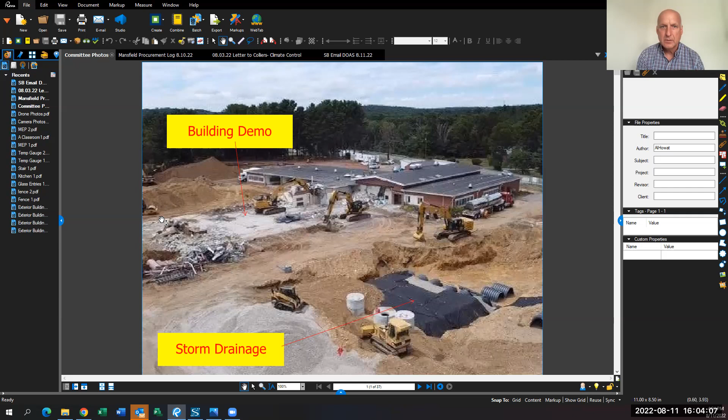This is the storm drainage that's in the new parking area. That's about a third done. There was one on the other side, which is complete and graded off, ready for the playground over there. Regarding the abatement and demolition, how is that schedule-wise? Actually, we're looking pretty good. I think we're going to finish up about a week to a week and a half early. That's good news. This opens up a lot of room. Once this storm drainage goes in and gets backfilled, it opens up a big area for the parking lot that they can start on. So it's got a real good start.

It's just another aerial view. Can I ask a question about abatement?

Sure. One of the things we heard during the earlier discussions about whether or not to build this school was that there were contaminants present of various kinds, and I'm wondering what you found in terms of asbestos, lead, PCBs, whatever needs to be abated. Everything has been pretty much per the plan. We do have a small change order for some additional glue dabs on blackboards and tack boards, but that's the only extra thing we found. In terms of finding some of those, there's no surprises. Those substances have all been present, but they are being abated.

Is that correct? Yes, the only additional item we've had is we had to test some additional blackboards, and they did come in positive for asbestos. So we had to remove that, but it wasn't a large change order.

This is Adam with Colliers. Just to expound for 20 seconds, the hazardous materials consultant, Langan, who was retained to go through the building and identify hazardous materials, is the one that picked out all those locations. So when Al mentions the discovered condition, which we're still reviewing, that was in addition to all the elements already known by the hazardous material consultant. So for all intents and purposes, the abatement occurred in alignment with expectations. Correct.

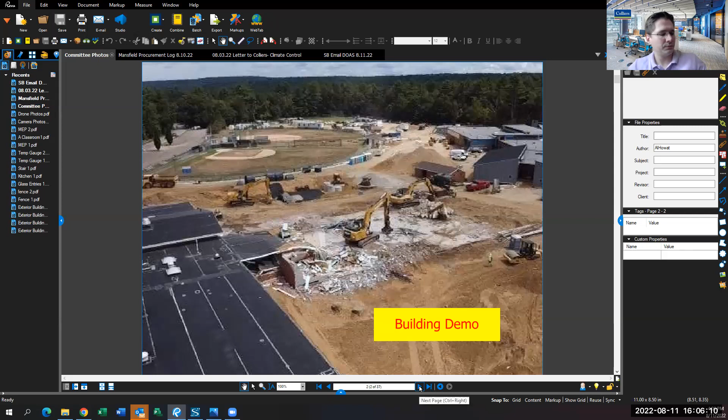So this is the area of the other storm drainage system that I had photos of at the last meeting. This has been complete, tested, backfilled, and actually the playground contractor started layout over here today.

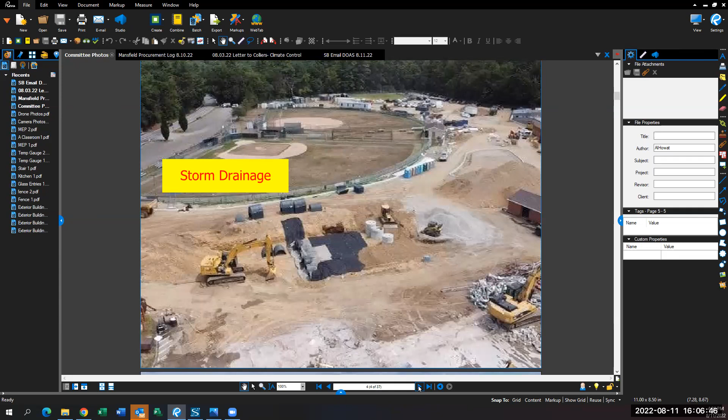Just another aerial view. Those circles we're seeing in that picture weren't the bike path, were they? No, the bike path is farther down this hill, I believe. So this is just a regular playground area. Yes.

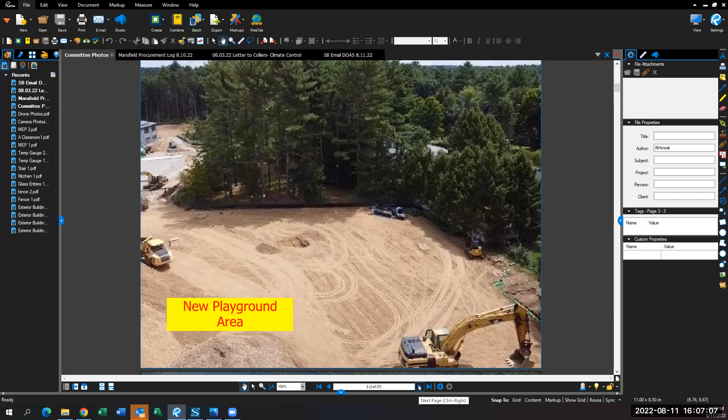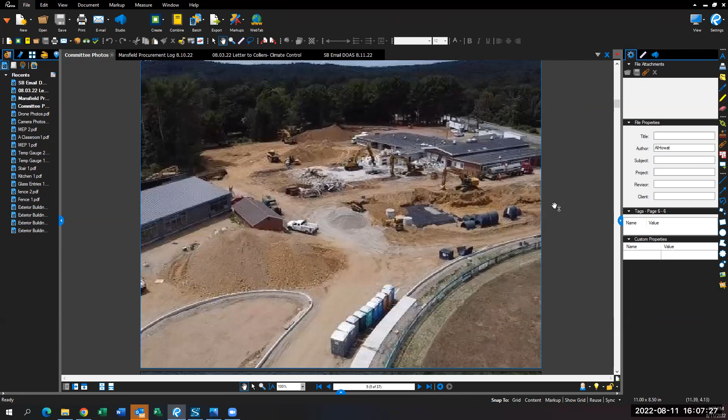Just another aerial view of the storm drainage, and a little farther away. This is the area where there's a new playground set up. So once this is done, we'll finish the curbing for the bus loop and start getting this ready for paving while they work on the parking lot.

This is an aerial view of the building from the west side. These are other activity areas here as well, which are coming along pretty good.

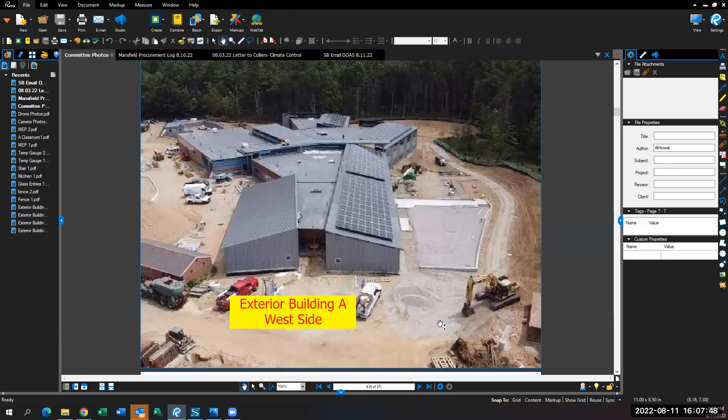This is the exterior building, west side. They've got the Ipe going here. They should finish this up within the next couple of days. We have the Ipe for the canopy, and we have a delivery date for that. I believe it's coming in two weeks or a week and a half, and then that will start going in.

Is the framing for the canopy about to start? Yes, actually the wood is in their shop now. They're just preparing it for delivery. And those are the posts, where the posts will be bolted down, we can see. And is that starting relatively soon? Yes, that will be starting in the next week and a half.

This is the loading dock area. The Ipe siding is going on here as well. Masonry is finishing up for the retaining wall. The curtain walls are going in.

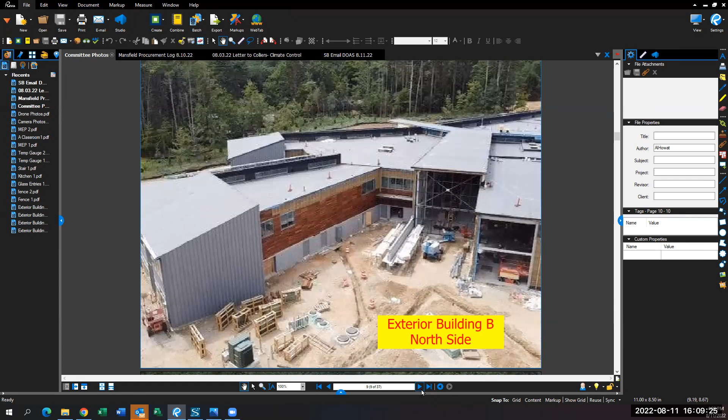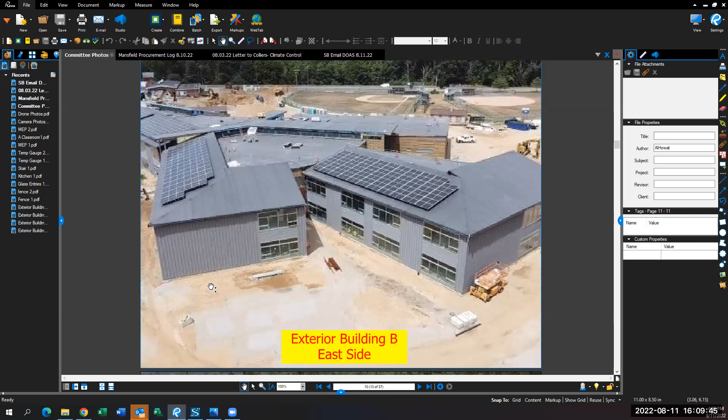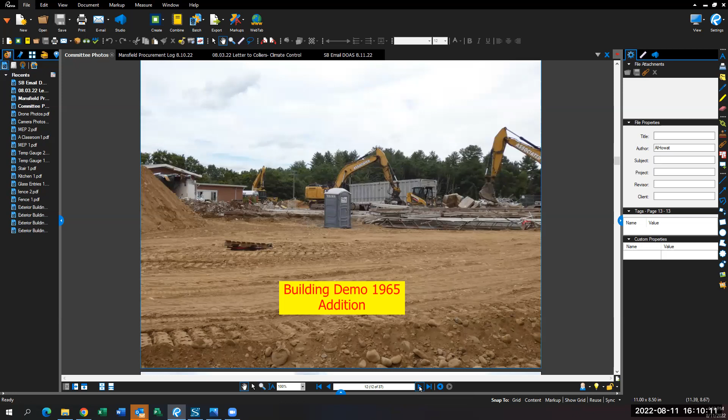Some ground pictures. This is the building demo, 65 addition. Storm drainage in the parking lot.

It's the IPE siding going on in the nook in area B. Once this IPE is done and the soffit fascias are done, they'll start the concrete walks.

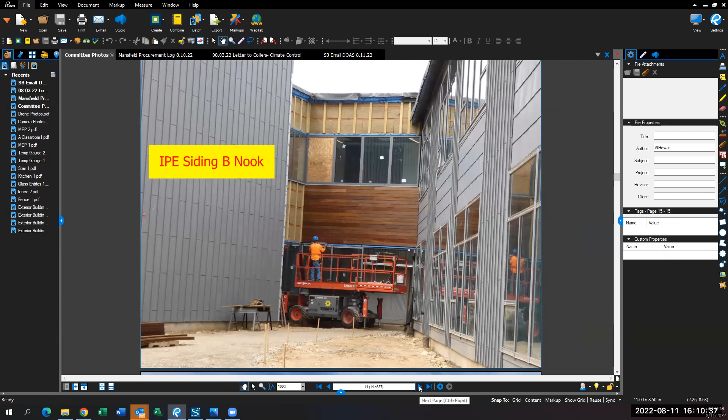Retaining wall itself is done. It's just waiting on the cap. We need to get another sample and get it installed for inspection by the landscape architect.

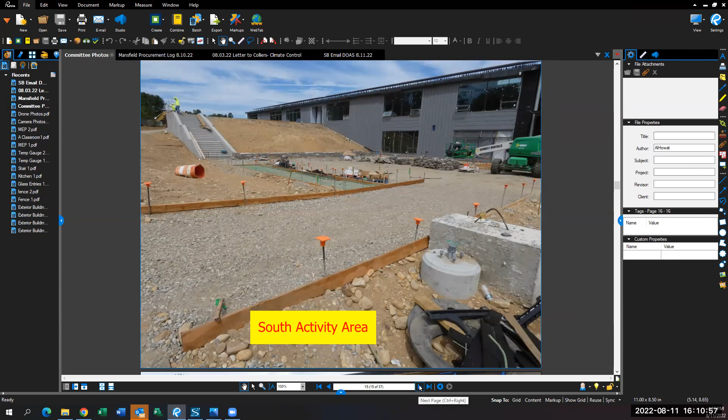It's the IPE siding at the gym. Installing IPE siding at the gym.

Loading dock area. This is area A, west entrance. They do have all the entrance frames in. The aluminum frames are starting to put glass in now.

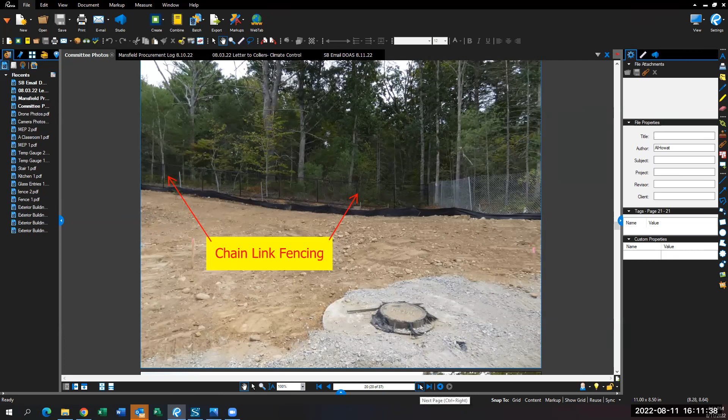The fencing contractor has started. He's got his chain link fence up around the back side, or the east side, of the property. He's done his chain link around the pump house.

And he also has the board fence, which will be along the west side of the property and the south side of the property in the front by the road. And along that property line.

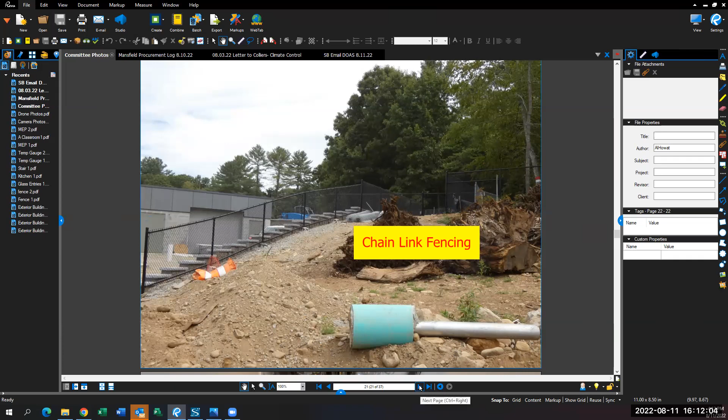And that fence goes all the way around the backside of the pump house, right? Yes, yep.

This is A corridor, A wing. We're getting ready to do ceiling grids in here next. We've already started all the rooms.

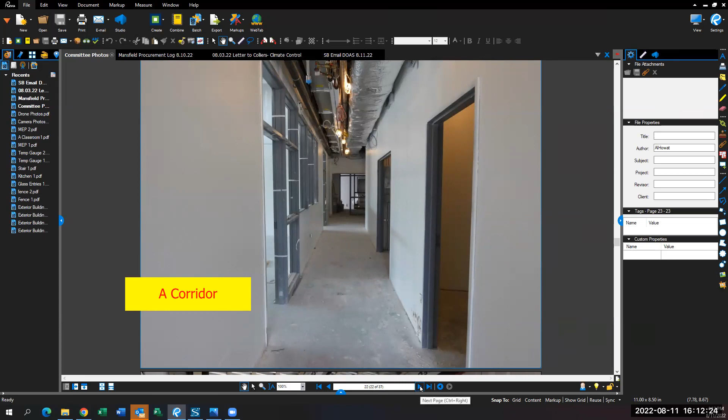A classroom is just about ready for finishes. But it's been too hot and humid to really do anything.

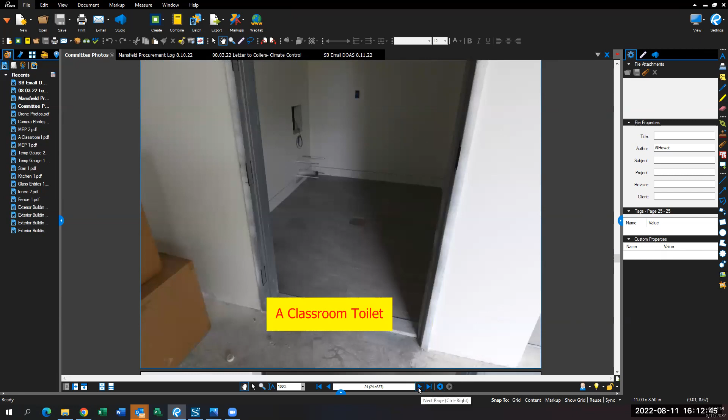These are the A classroom toilets. So every toilet in A wing now is done. There's one for every classroom. And then there's a few in admin too, which those the tile has been done as well.

So, Al, there was no issue, there's no issue in A with the dusting.

We took cores today. We did 2 cores in A, two cores in B lower, 2 cores in B upper. We're having those analyzed. We do have dusting in A. We just don't know the extent of the issue. That's why we're having the cores tested.

But so you could go ahead and do this floor, these floor people weren't as particular? Well, how come it was okay to do this tiling and not others?

Yeah, this is not affected by the dusting slab. The tile work can go on that slab, no problem. It's only for the resilient. It has a glue that just won't bond to the dusting concrete.

I see. This is... Thank you. More of a mortar base mastic stuff. Uh-huh.

So we started putting toilets in the A-wing classrooms, following the floors.

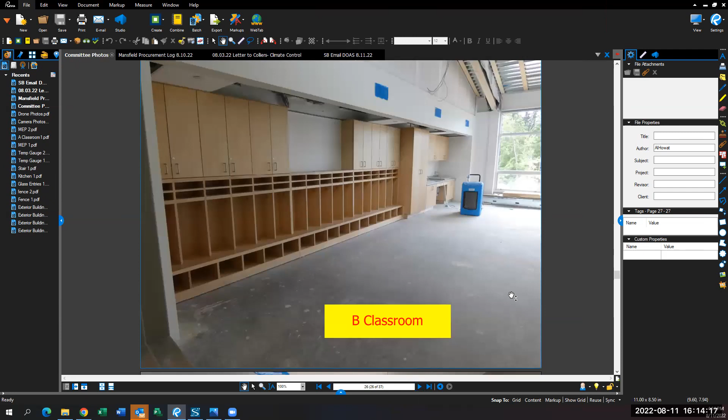B-wing classrooms, a lot of finishes are getting installed now. It's basically ready for other finishes, flooring and acoustic panels and so forth.

In B-wing, we've done a lot of the ceiling tiles. We have been keeping this area under 55 percent humidity, so we don't see a problem with that.

These are the hand wash sinks up in front of the unisex toilets. Those are installed now.

We have toilet partitions coming next week. They're supposed to be delivered to their shop tomorrow.

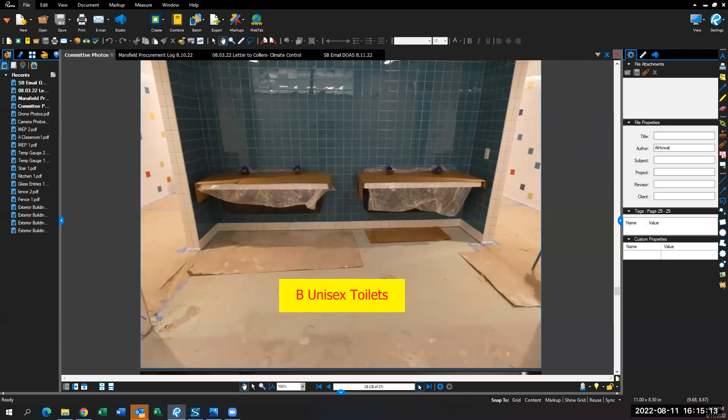But we are having a hard time with the temperatures. This was taken today, and it was a fairly cool day, but it's almost 90 degrees inside.

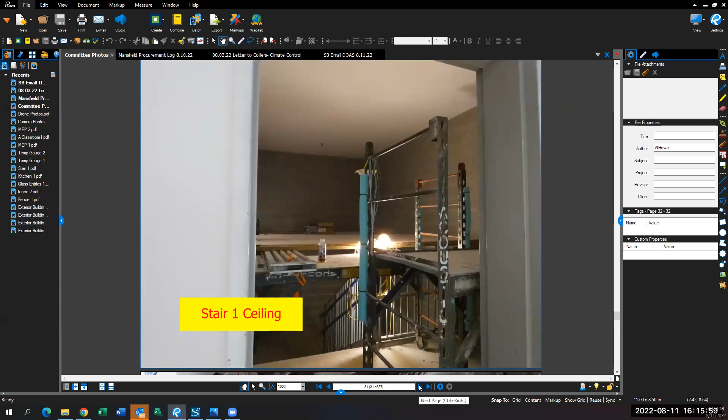In the kitchen, we got the epoxy floor in. We're going to put protection on this tomorrow. And then we can start the porcelain tile out here.

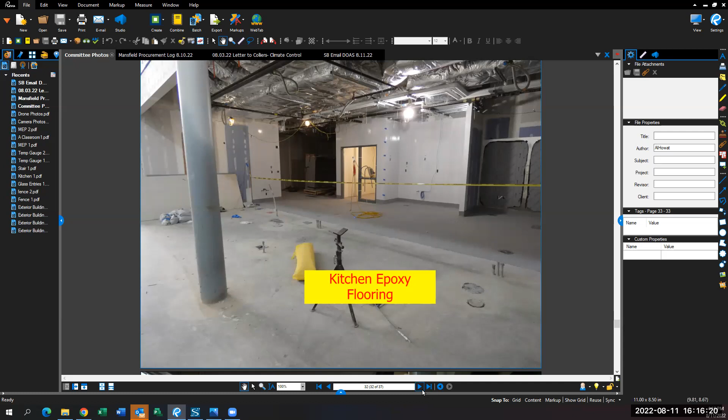This is that curtain wall in the cafe.

They said they're putting all the glass in the entryways.

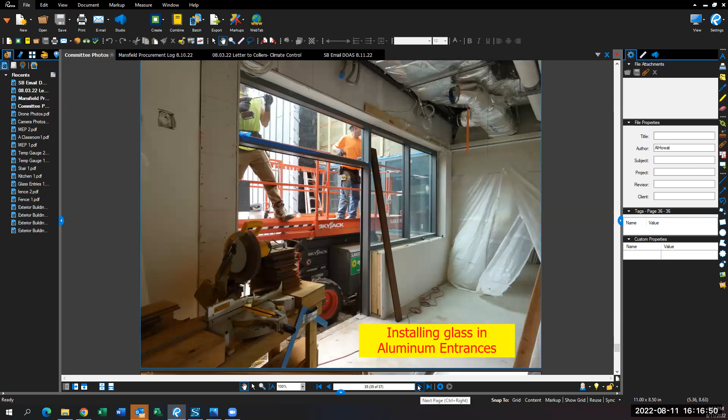MEP roughing is ongoing. This is all the plumbing for the heat pumps, which we'll need for air conditioning or heating.

And they've started putting in, this is a speaker, they've started putting in some finishes for the electrical specialties. So that's it for my photos.

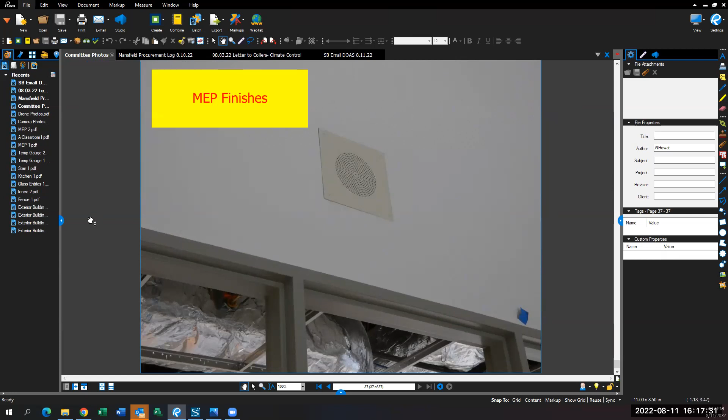Any questions on photos? Chris? Al, I noticed the curtain wall in the cafe, the gym, walls, they're not done. The glass isn't in yet.

You're still holding off because of the DOAS units, or what's the holdup there? This curtain wall here? Yeah, they've just installed this. It's secure. They're going through each pane now, caulking each of the openings to install glass. So they were hoping to have glass in here tomorrow, but if it's not done tomorrow, it'll be done Monday for sure.

Because isn't all of that hindering your ability to get more conditioned air happening? It is, but we don't have anything to give us conditioned air. We have some AC units in B, but they're really not doing what we need them to do.

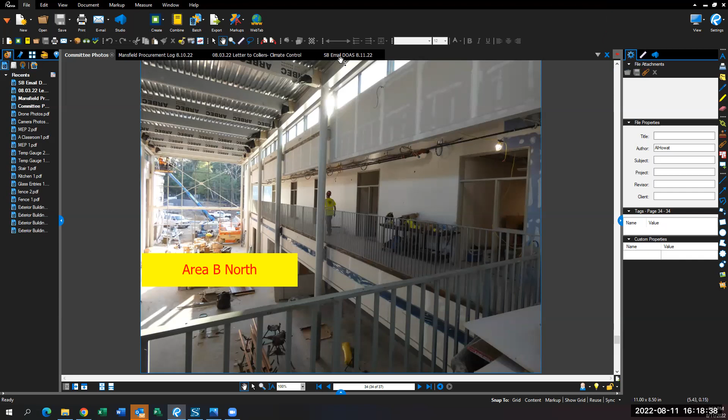So what's the projection now on the DOAS? Actually, I got an email from Sullivan Benson this morning. Can everyone see this email?

Yep. I asked him, any update on delivery of DOAS? He says, we need the main fan section. It hasn't shipped. Swan is supposed to be getting an update.

So I called him back and asked, I wanted to ask him, have they shipped anything? Because it sounds like they shipped something, but not the main fan section. But he was not in. I left him a message to call me back. So I should have an update tomorrow.

And find out if he has received anything and what the expected ship date of this main fan section is. Because just like you decided at the last meeting to do a different walk-in, how much longer do we wait for this DOAS unit before we say we have to get something else?

I think it'd be more time to get something else, probably. This is Adam McCullers. It's a much different animal than a walk-in cooler unit, which is its own compartmentalized thing. There's a design process, it's very customized. To switch to a different manufacturer would be like starting from scratch. It's not a simple one for one.

No, I realize that. However, we've been waiting for this thing for months, and now it's starting to hold up the job because you can't do certain things unless you have a conditioned space, and it's August.

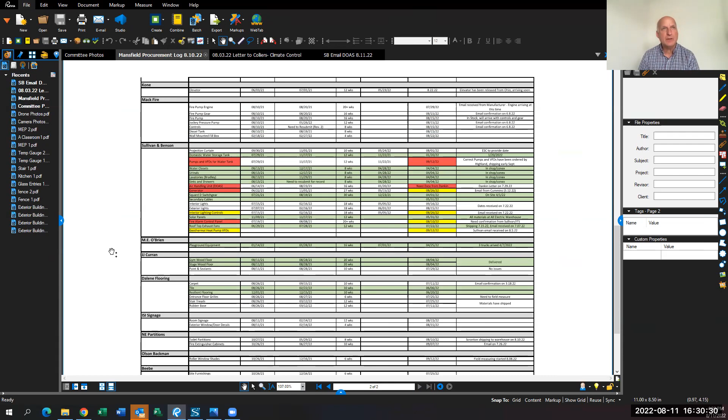Because even without the DOAS unit, could the heat pumps help cool, or do you need the DOAS for that? From what I understand, they can basically circulate air, but there's no conditioned air. You're just circulating the air within the building. Okay, similar, I mean we have fans all over the place too, and they help. Right, circulation of air in the building does help.

But, can I jump in here, Andy? Sure, go ahead. We've coordinated with Craig Raza, the mechanical engineer, and we've talked about the DOAS unit for a long time now. We've talked about the heat pumps basically this week. The issue with the DOAS unit is that it provides the fresh air, so you need it for occupancy, but it's your fresh air swap out. It doesn't condition, it doesn't do any of that. The heat pumps are what drive the actual air conditioning portion of it, but they don't provide the fresh air.

So up until this week, the notion was that the heat pumps and the other portions of the mechanical systems, minus the generator and some other items that have been pushed a bit, would be able to provide conditioned air to the spaces. It just wouldn't have the fresh air intake required for final occupancy of the building. So you could get cooler temperatures and whatnot. But if there are no variable frequency drives, the heat pumps cannot function. So the fact that those are delayed by some amount will impact the overall sequencing of the building and the completion of some of these spaces.

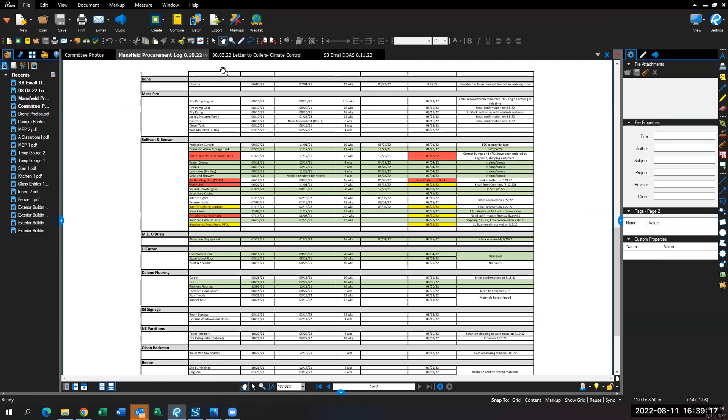I'll take that one, Adam. No, we have not been involved with the state specifically on this project. The state is well aware of procurement issues right now when we reviewed other change orders with the state, so I don't anticipate this affecting anything from a state funding standpoint. It's more everything that Adam laid out, as far as scheduled deliveries, impacts both to construction and also impacts to furniture, equipment, and delivery schedules that were anticipated to start on September 20th.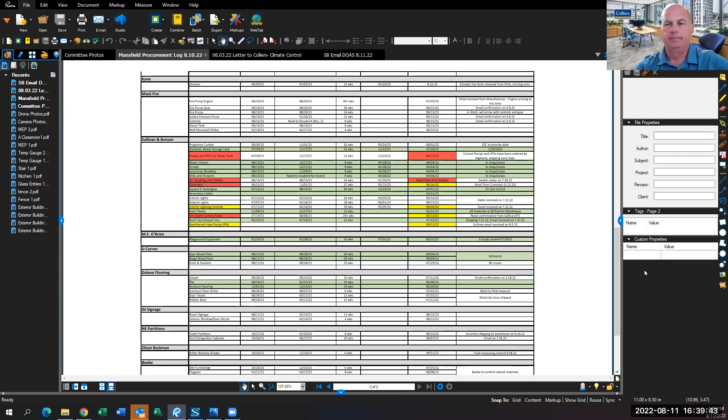Okay, Chris, you've had your hand up for a while. Thanks. Adam, are the VFDs really hard to find things as well, or do other companies make the ones that'll fit in our unit? Is that an exclusive thing that we have to get from one purveyor, or could we go elsewhere?

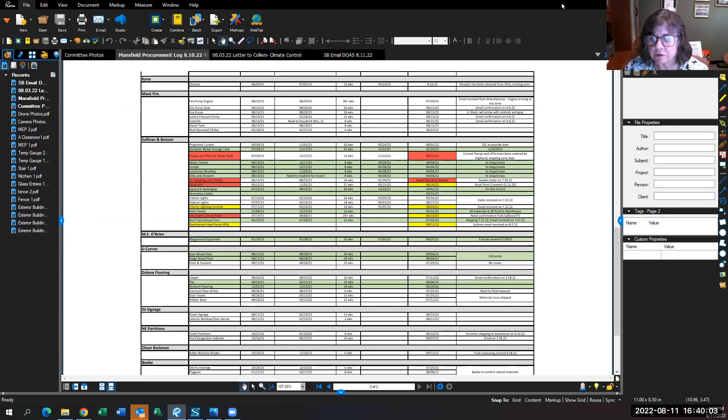My inclination is that's somewhat similar to the mechanical units. It's likely not as involved, but it's not as simple as you have this product, you go to that product. All of these are designed and have fairly tight tolerances as part of a complicated mechanical system. For example, the freezer was a little simpler—it needs to maintain some amount of insulation, there's a horsepower of a motor, that kind of thing. With this, there are a lot of tolerances.

So, in the abstract, if this manufacturer all of a sudden shutters their doors, could we get additional VFDs? Yes, I'm sure there are other manufacturers. At this point, would it make sense to go back to the drawing board, look at new specifications, and try to get an alternative manufacturer?

That I don't know. Like I said, we just heard about this today. So part of it is we need to understand what the crux of the problem is. Is it some market-driven problem where none of the manufacturers can get this certain chip from overseas? Or is it similar to the freezer unit, where there are other manufacturers that could potentially do it, and it's just that one had an issue and couldn't deliver.

So on your questions, both on the DOAS, but to a greater extent the VFD, obviously we're going to look at all the options to see what makes the most sense. But if I had to just estimate right now, it probably would be more efficacious to identify where these are rather than trying to resubmit. But we're looking into that and we'll get the data from the vendors. Thank you.

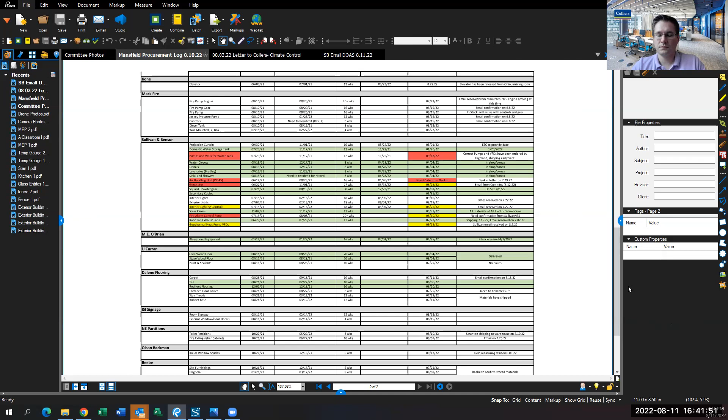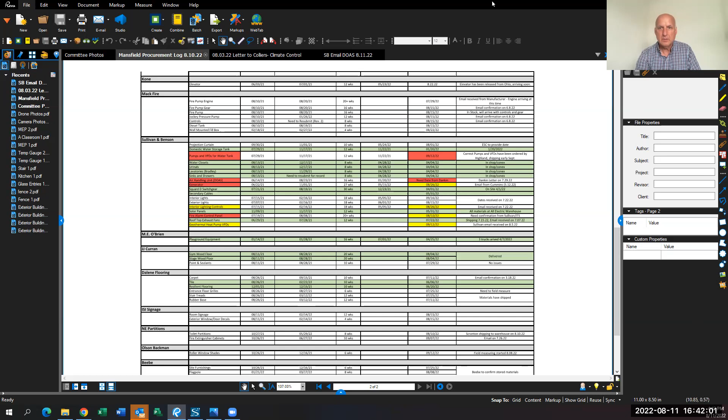Okay, any other questions for Al? Okay, seeing none, then thank you, Al, for that update. And we can turn it over to Jeff for the architect update.

Okay, I don't have much. I was out last week on vacation, so I'm playing catch up, but basically just responding to RFIs and submittals, and I'm due to go to the site soon for another walkthrough and another site observation report. So we'll see—looks like they're moving along quite fast, so I've got to get over there and start moving through the project again.

Okay, questions for Jeff? All right, so then let's move on to the OPM update. So Adam? Yes, so we actually talked about a number of the topics I was going to bring up with Al. The four focal points for the project are demo and abatement, the site work, the interior of the building, and then the exterior envelope.

As Al has kind of alluded to, the demolition has gone very well, which helps alleviate some of the stress on the site portion of the project, which we knew was a critical factor in getting the parking lots done, all the attendant stormwater and utilities and all the things done. So I don't want to understate that that's a very good piece of progress that has been made.

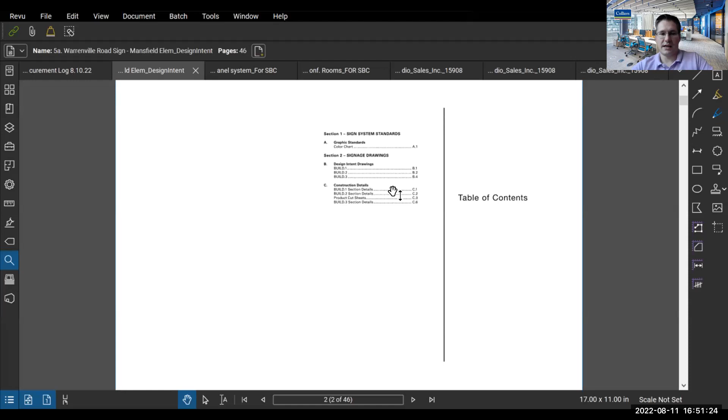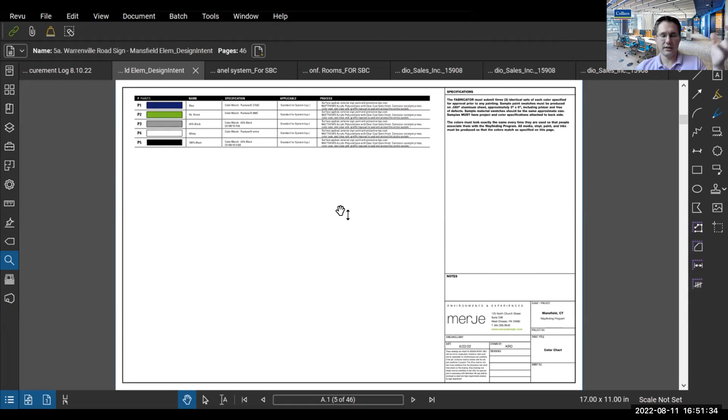So in terms of the type of sign, for example, the way that the wayfinding signage for the entire town has settled was for buildings of the nature of the elementary school, where it's a substantial public building. The option across town would be this low stone option that you see here. The font, the color scheme, and so on, that's what's been put forth by that committee and is being implemented throughout the town.

In terms of this committee and the signage relation to the project, obviously Colliers works for the committee and we'll do whatever the committee wants in this regard. However, I do want to impress that this is what the town has elected to move forward with in terms of the signage. And then in terms of the location, I did do some additional due diligence there, working with the signage consultant.

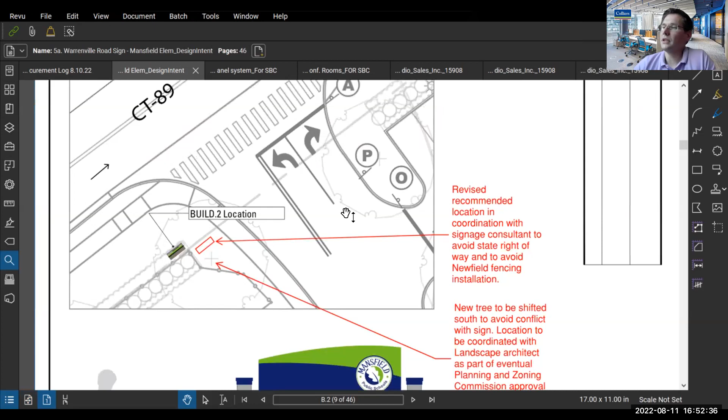Essentially there are two locations that were initially earmarked for this monument sign in relation to the power being brought out there for some of the pin lighting. This dashed line here, it might be a little hard to see where it's gray with a little dash and then gray - that's the property line separating the project site from the state right of way. So there's a strong recommendation not to have the signage out here in the state right of way as initially suggested by the signage consultant.

That would require a separate permit, and if there's any changes in the future, it's on state property, so there's always that conflict as opposed to being on town property. There's also discussion with the signage consultant about potentially incorporating it into the fence here.

There's a suggestion not to do that, to avoid conflict with some of the Newfield fencing work done as part of this project, and who's responsible for putting it in and taking it out while the site is supposed to be getting cleaned up.

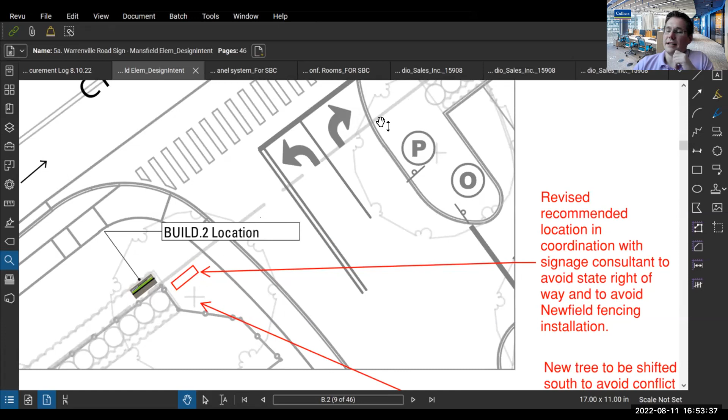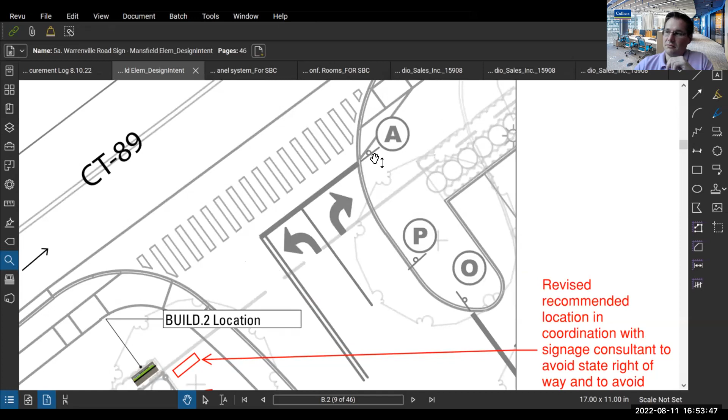So you're left with two locations, one as I've drawn here, and one on the other side. The signage consultant did not recommend having it on this side, largely because when you turn into the site from either direction, you're pulling into this lane, not on this side. And more pertinently, if you've got cars waiting to exit, they'd be blocking the sign if it's not in the state right of way, and you wouldn't be able to see it, particularly if coming from the south. So we're left with this one location.

I believe this tree here was brought up as a point of discussion. This is a new tree that will be flagged on the site by the landscape architect, so it can be shifted out of the way so there's no conflict between the tree and the new sign location.

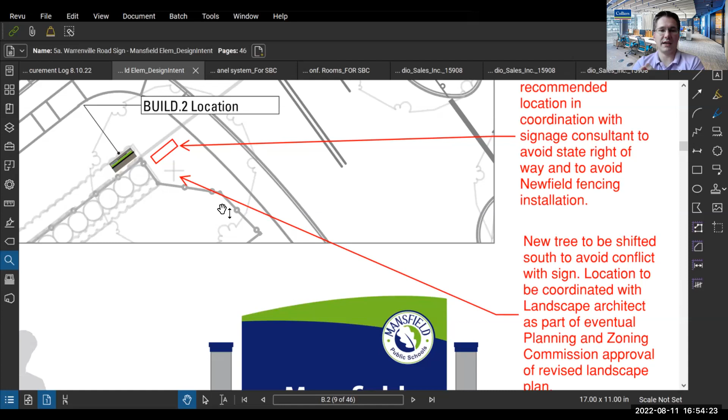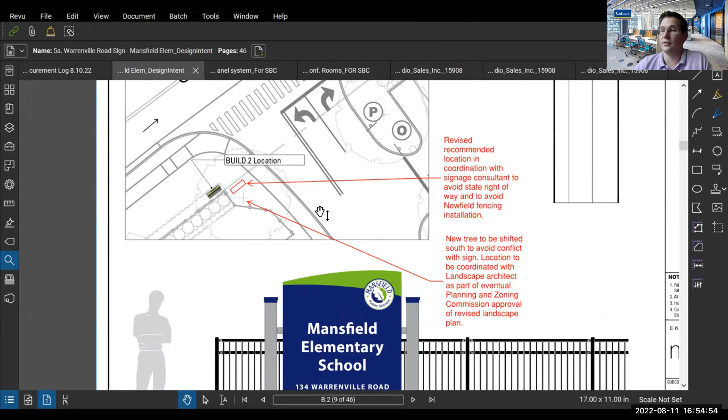So ultimately, why I'm bringing this back up before the committee is the town planning department, before they put this off as part of the update to the landscape plan for the Planning and Zoning Commission, wanted to ensure that the building committee was in alignment with an overall plan of what the sign needed to be, as well as the costs. So the recommendation, in coordination with the town wayfinding and wayfinding consultant and their expertise, as well as some of the project constraints, is to have this sign at this location.

And that cost, the estimate from the signage designer, was around $20,000 to $21,000. They received that by reaching out to one of the companies they know that does this type of work.

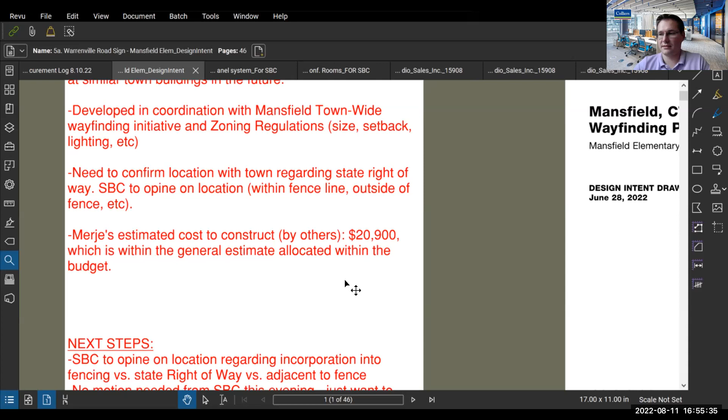So the request here tonight doesn't necessarily need a motion. I just want to ensure that before I move forward and reach out to planning and zoning, to confirm they don't have any more issues, and before we go out to bid for this, that there aren't any major concerns with this committee, and that this low monument sign with the small amount of uplighting in that location generally aligns and is acceptable to the committee. If there are exceptions we can review them, but by and large this is the type of signage being installed throughout town for this type of building.

Chris? Randy? Let's make that Chris first and then Tony.

Thanks, Adam. When I looked at the dimensions of the sign, I was surprised that it was about 7 feet tall and 7 feet wide, which is quite large. Two things came up for me: I know you have to have a certain size sign to be able to see it, but since this isn't a school that's going to be used for a lot of public events - it's an elementary school, not like a high school or middle school - and in light of the things we're doing to ensure student and teacher safety, I thought it was kind of big, and I didn't know if we had given any consideration to making it smaller or less.

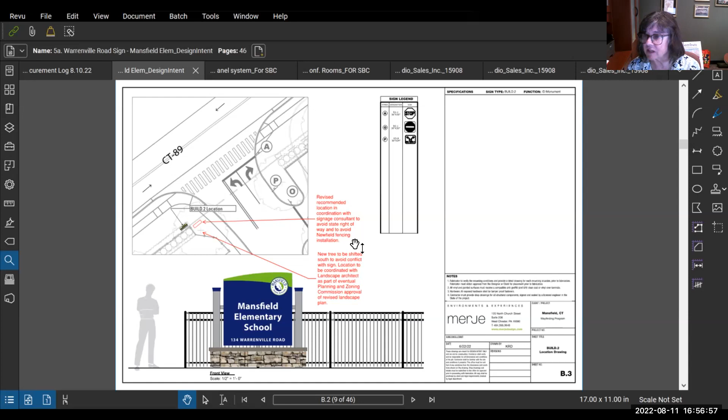I don't know, noticeable, flashy. Imposing. I don't know, something like that.

Having sat in on the wayfinding signage committee for a couple of their meetings, in terms of size, there were far more iterations that had come up there. So in terms of the actual dimensions, I don't know that something smaller was considered. I know there were some of those bigger, Mansfield-type giant monument signs that were considered and ultimately not recommended for the broader spectrum of these types of buildings. The only thing I can tell you with regard to size is that the consultant did check against the regulations to ensure it wasn't so abnormally large that it didn't fit within the zoning regs, and it didn't surpass that limit. So the answer to your question is I don't know that there's been consideration for a smaller sign, but it didn't strike the wayfinding consultant as being particularly large.

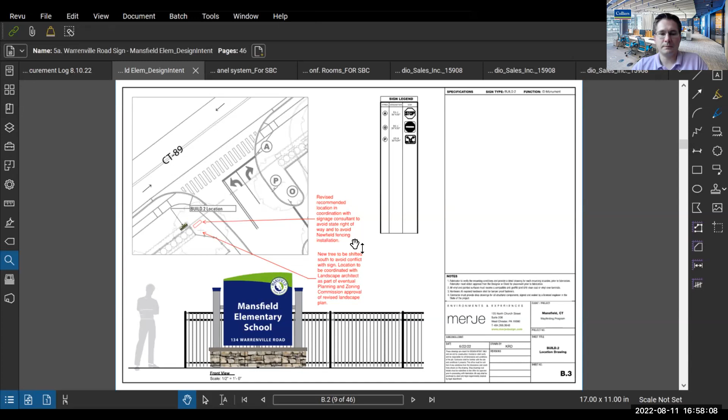Okay, we'll do Tony and then Rich. I would certainly support reducing the size. These new entrance signs to Mansfield certainly establish our identity as different from other towns, but my own personal feeling is they've been a little bit grandiose.

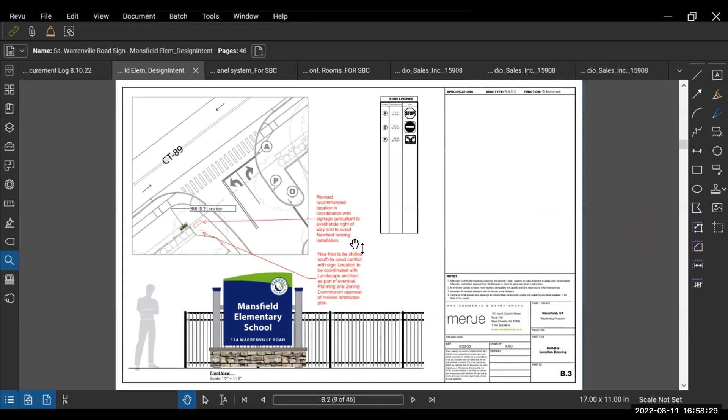But I also wondered if there was going to be a sign on 195. There's no, I mean there may be one of those brown signs, 'elementary school this way.' To be honest, I don't know. I know there were discussions about that type of signage throughout town. I don't have that answer in front of me. It wasn't resolved the last I heard, and there's been subsequent developments. I can ask about it, but I don't know the answer off the top of my head.

Thank you. Rich? It's a nice sign. I was just wondering if there's a way to incorporate some of the Mansfield elements we're seeing in the signage around town, to reflect the fact that it's an elementary school. I don't know if there's a way to marry the two or merge them, but I see this sign and it could be any building anywhere - this is an elementary school after all. I was wondering if there's some way to maybe do that.

I would say that to get to that level of specificity, we would be retaining a new set of signage design services to do that. We can explore that, but in terms of having signage installed in conjunction with the opening of the building, that would be the time to do it. At this point, getting this resolved and out to bid in short order would be required to have the sign up in alignment with the actual school opening. That would definitely not be the case should we try to get a different signage consultant to design something.

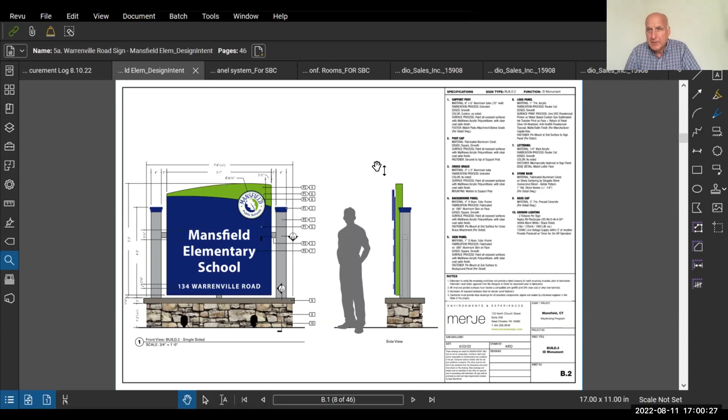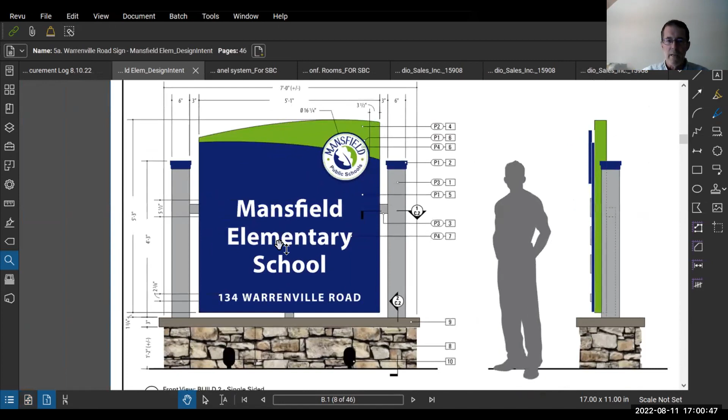I'd like to second, third, and fourth, if you can, the size point - it's just too big. We said this last time. I don't know why, Adam, this is the same thing we saw last time you showed it to us. It's as high as it is wide, and it's just not to scale. And I agree with Rich. I don't know what you do, and I'm sure that's more complicated as far as bringing in some element of elementary feel, but regardless, it's too big. It mixes too many styles. It's just not that appealing in general. So let's not make it big.

Randy, if I may, this process came very late to the table and was town-driven. Scott, I'm sorry, you don't need to defend the process.

I was just going to suggest that maybe there's a subcommittee to this building committee that reaches back out to the town that was driving this, since this was put upon the committee to help move that forward. Maybe a subcommittee could get formed from the building committee, because in essence what Adam is doing is just reporting. I get it, which is why him defending it isn't necessary.

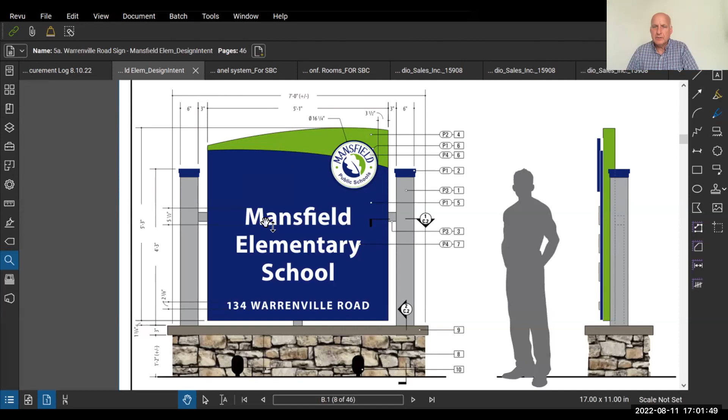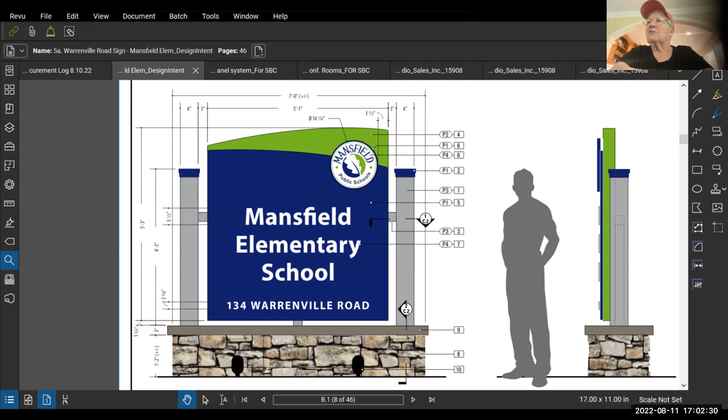Thank you, Randy. I'm in agreement that it's too big. I feel, in light of what we're looking at, that to point out where our elementary school is with a brown sign saying come this way to the elementary school, it does not make sense in terms of safety. I agree with what Chris McNabo said - we should be going away from that kind of thing. We don't have events going on at the elementary school the way we do at other schools in town, and I would prefer it's as low key as possible. We don't need a sign on 195. People that need to get to the elementary school are going to know how to get there.

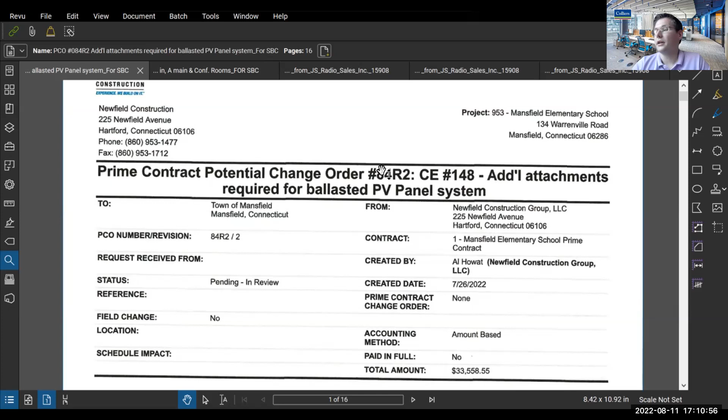to come up with this PCO for the additional attachments to tie it down to the roof. So that's what this is for - additional mechanical attachments, additional roofing to seal it so the penetrations are sealed up for the roofing system, for the solar panel system.

If I can say something, Adam - this is Jeff Brown from TSKP. This number originally started at 60-some thousand plus, but working with our structural engineer, he was able to increase the loading capacity via his factor of safety. Each of these delegated design companies and engineers have different takes on how they interpret or want to ballast or not ballast their system based on different wind exposures and categories we're in. So we were able to reduce that number in half and reduce the number of physical penetrations to the roof.

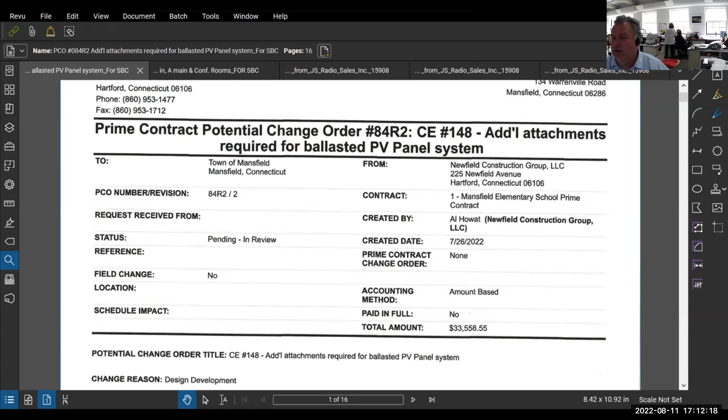But in the flat roofed areas, we'll have some penetrations. They won't be as substantial as the sloped roof penetrations. They're basically a little pancake aluminum or galvanized steel plate that gets fastened through to the deck, and it's not a welded connection to any structural issues at all. So that's the history and story of how we got these numbers down, and it's at 33,500 is what you're seeing today. I'd like to move we approve it.

Okay, we have a motion to approve PCO 84R2 for the additional attachments required for the PV panel system. Is there a second? Rich, okay, thank you. Any other questions?

Okay, then all in favor of the motion to approve PCO 84R2, please indicate. Any opposed or abstentions? Okay. All right, thank you.

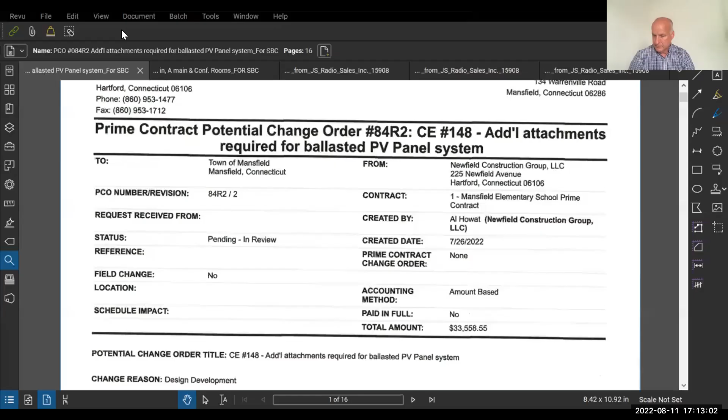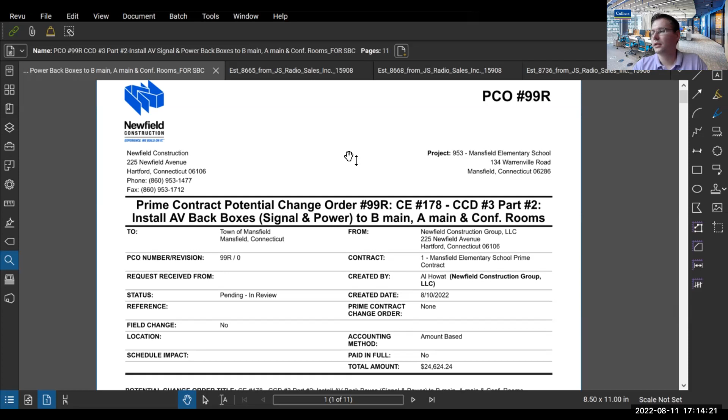The scope for this was at 44 of the rooms throughout the building. There were display mounts that originally had some backer boxes intended. In coordination with Jamie from the town IT system, he had a different style mount procured that would allow for the scissor-like installation so you could raise and lower it. The issue was that would require a different backup framing system. But in terms of this PCO, it requires additional electrical work, electrical boxes on the side, and some additional conduit. So the scope here is for installing that infrastructure to support the new configuration of TVs at 44 rooms within the building.

I can add to this, Adam. In meeting with Jamie and going through all the past history of our meetings with technology and the teachers, it was the assumption from our electrical and mechanical engineers and us that there was a system of display panels in all the classrooms and teacher workstations that would telescope horizontally outward. What Jamie wanted to do after those discussions early on was a guillotine sort of up and down adjustment to the height in the classrooms and teacher workrooms, to raise and lower based on a child's height so they can interact, or a teacher can raise it up.

So the initial one that we had was a box with conduits feeding into the box with outlets for the display unit, et cetera, which required a hole in the wall. The guillotine system, the sliding vertical track, does not require the box. So we had to take the conduit that was coming to the box and run it to exposed wall-mounted junctions behind the monitor for the power and the AV. So that's where the cost came in.

We caught it after, I forget how many were done, so we tried to catch it as fast as we can. We even had a meeting with everybody. Jamie was there on site, and this is all unfortunate, but it was something that Jamie and I think the district needs to have happen, for the flexibility of positioning these display panels interactively with the students and teachers.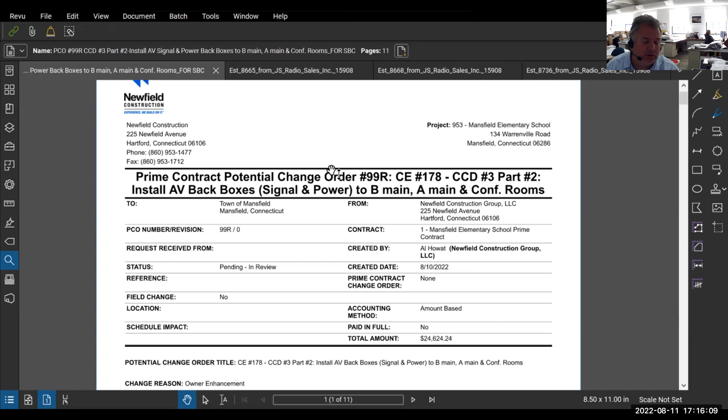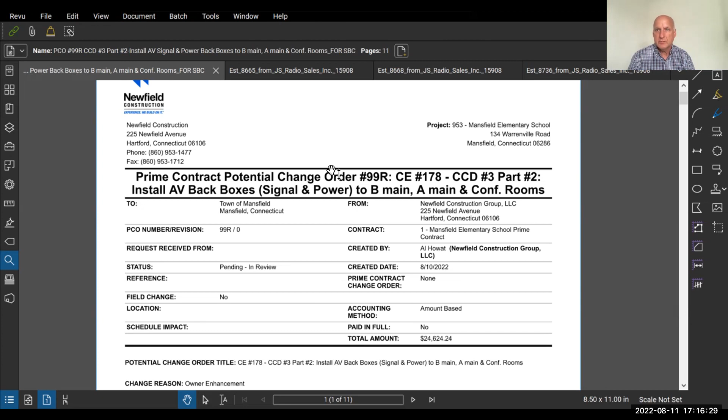Right, so it's frustrating, but I'd like to move we approve it. Okay, thanks, we have a motion to approve PCO 99R. Is there a second? Kathy, thank you. Any final questions or comments? Then all in favor of approving the motion please indicate. Any opposed or abstentions?

Okay, no, and Randy, I'm sorry I wasn't quick enough to switch my camera on to vote at the last one, but I support the PV panel system as well. If okay, Tasha could make that notation. Okay, I got it, okay, great.

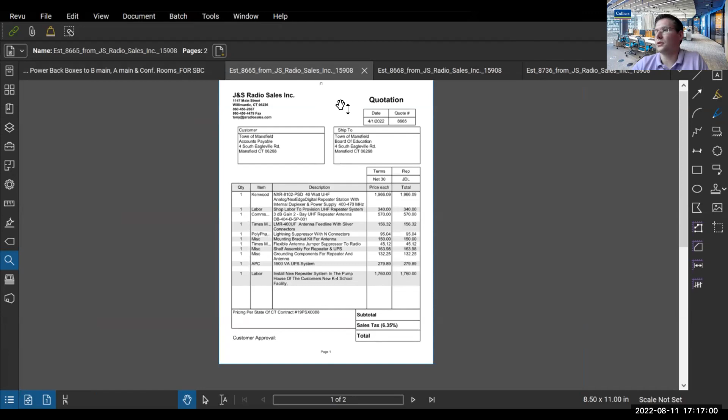The last three items are sort of joint across three quotations. These are basically for the ability to have antennas at the pump house and supporting equipment for two different radio systems for the bus loop, for bus system coordination, so that the elementary school can communicate with the buses. That functionality was not available at the existing Southeast school. It was requested by Bill Tretch with facilities, and I believe Alan Corson and Principal Rodriguez, as well as having another antenna system so that walkie-talkies around the campus, and I believe it also interfaces with first responder communications, will be able to function.

So these will be installed at the pump house. The three quotations are one for one system, one for the other system, and the third for the actual portable units and communication devices. In addition, there would be a subsequent PCO for Newfield for one outlet and some plywood in the pump house. I don't expect that to be a major cost, but I coordinated with the vendor about these antennas, and he requested that if we're going forward, he be able to put in the order for the equipment soon. He didn't anticipate a problem, but wanted to get it in. That's why you're seeing this in advance of the single outlet and plywood for the pump house.

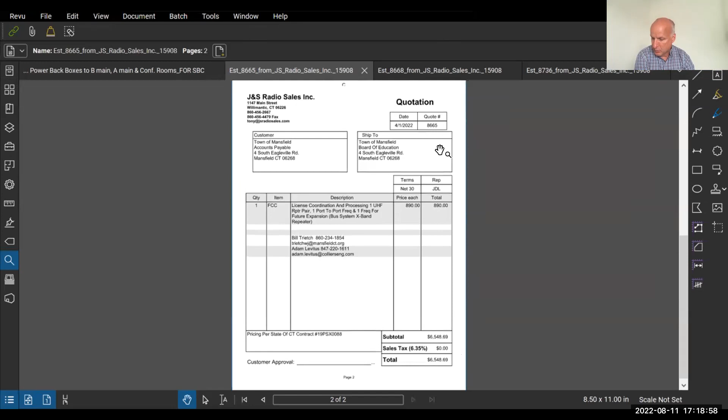Are there questions on this? Further questions? Okay, so there's three separate quotes: quote number 8665, dated April 1, 2022; quote 8736, dated May 18, 2022; and quote 8668, dated April 1.

So is there a motion? I think we can do these all together. Is there a motion to approve all three of these quotes? Mary? Okay, thank you, Mary. And then second, Madison? Okay, then all in favor of approving these quotes please indicate. Any opposed or abstentions? Okay.

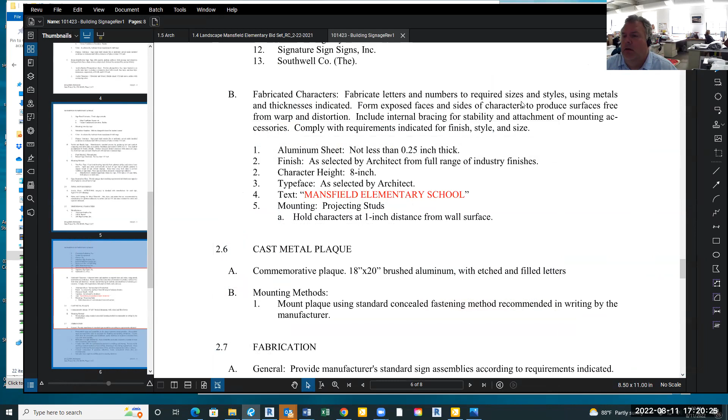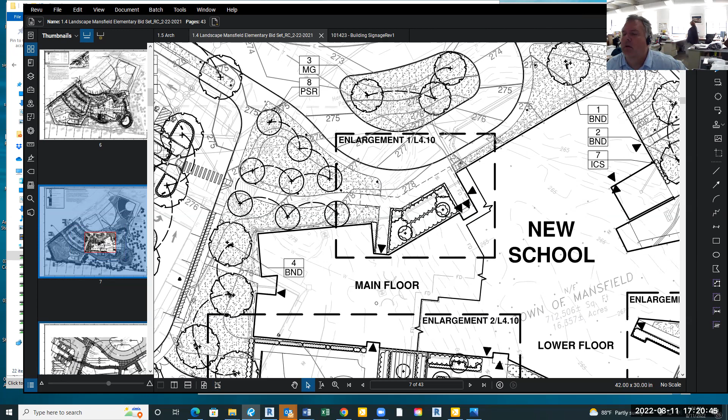Let's see here. Our main entrance is here off the bus loop, so I'm thinking somewhere in this area here on the building, or the canopy, probably the canopy, is where the signage potentially could go. So what I've done here, if I can get to my Revit model, let's go.

Let's see if I can see this. Something happened with my site, so ignore the sidewalk not aligning with the canopy here, but anybody see that? Yeah, okay, so hold on a second here.

So my first reaction was to put it on the canopy, centered here along this face, with 8-inch tall letters reading Mansfield Elementary School. The thinking is that if I do it back here, you're not going to see it. If I do it on the zinc, you're not really going to be near the front main entrance. If I do it on the gym up here, you're not going to see it. If I do the gym over here, we're getting too far away from the entrance.

So my thought is basically to put it right here in front on this fascia, with like 1-inch standoffs on the canopy. It'll be subtle enough to follow the datum, the line across there. That seems to make sense.

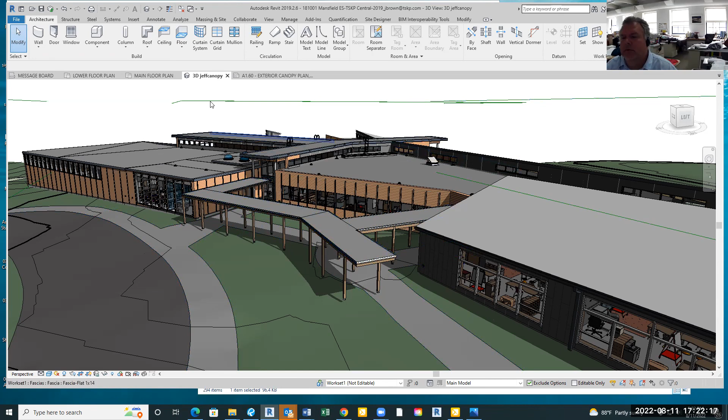The fascia is at least, how tall is the fascia? Well, let's see here, I think I have an elevation drawn. Yeah, it's a section through here, so I think we're just making it here to the roof.

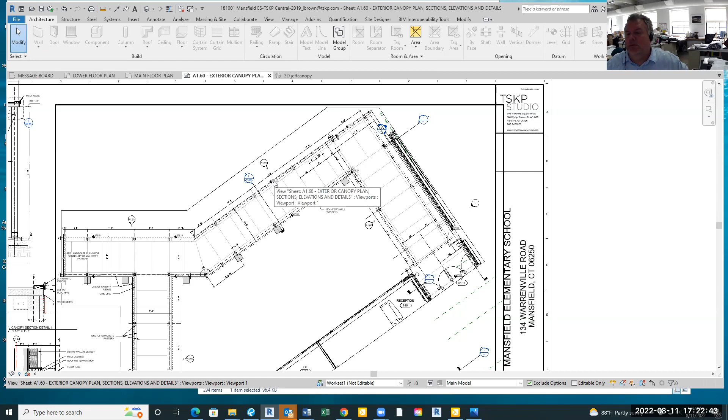So it would be centered basically out here, probably in this zone or this zone, one of the two. It's wide enough to fit in between the column supports. Chris, you had a question? How high did we have to deal with there? And I think that would be ideal to have it mounted right onto that.

Yeah, it looks subtle and clean. So I'll work with the contractor to figure out the fascia and what's exposed wood-wise, how to attach that. But Al, you don't see any issues with that, right?

If he's still there. He's on mute. Anyway, okay. Yeah, I'm okay with that, Jeff. Kathy?

You're muted. I love this idea. I absolutely love this idea, Jeff.

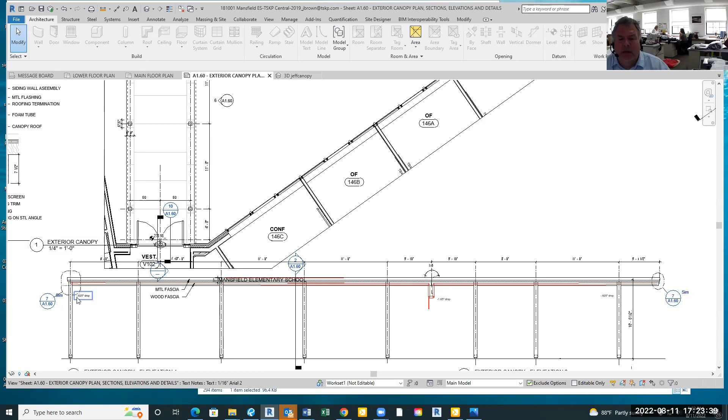I'm wondering, does it have to hang below the roof line or can it be centered above and below? Right now it's on the edge of the canopy roof. Would there be any coming up above the roof line, or would it just be... we can talk about that.

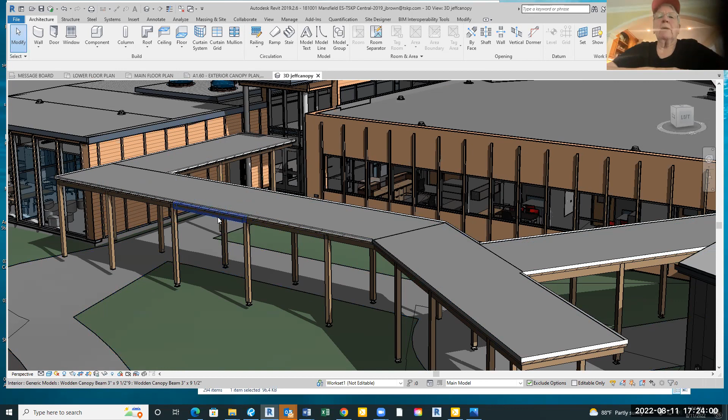I wasn't planning on it. I was trying to keep it in the zone of the thickness of the roof edge. Well, you're the pro, so I was just thinking. But I love this idea, Jeff, I really do. It's subtle, simple, and it keeps it off the road.

So is this in addition to the one on the road, or only this one? It should be in addition to the one on the road. I would agree with what everybody's saying. Maybe we can get Jeff to design one for the road.

I mean, I can look at it, Chris. You and I can look at it. I'll do it on the side, don't tell Richard, I'll look at it. But I hear what you're saying. I was saying in place of.

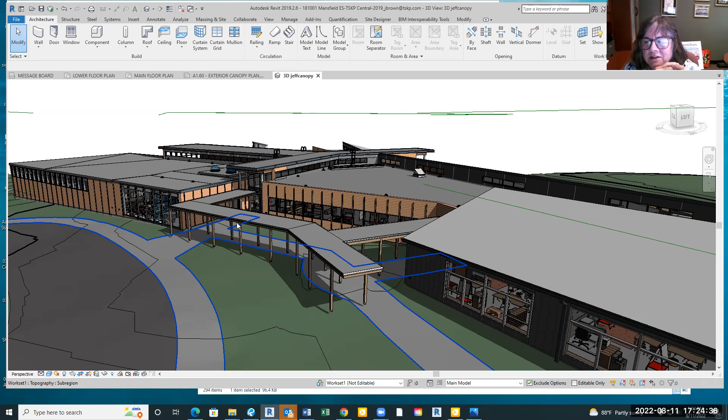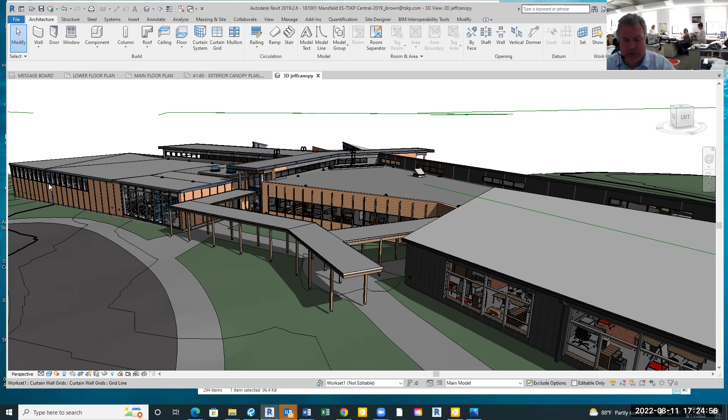No, I'd agree with what everybody said about the one on the road, if it's slightly smaller. Adam's put quite a bit of work into this, so I'd have to talk with him and the person designing it. Maybe there's a way, Chris, you and I can actually scratch something up and see if it works with the artist, not to contaminate his work, or her work, but just to give some input to see if we can come up with something better. Here's a start.

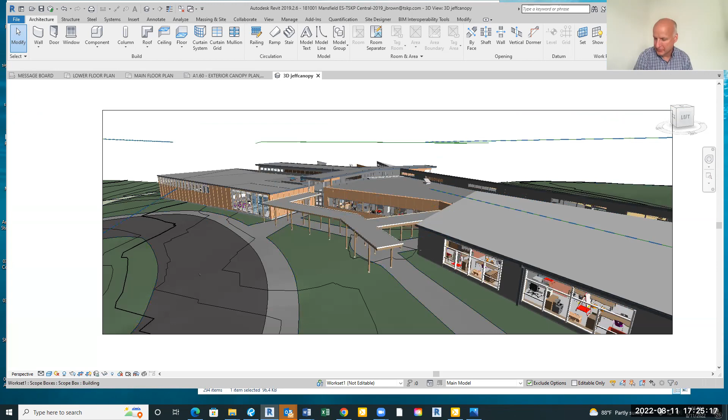Okay, alright. So I think we'll move on. We'll hopefully have the signage consultants with us next time.